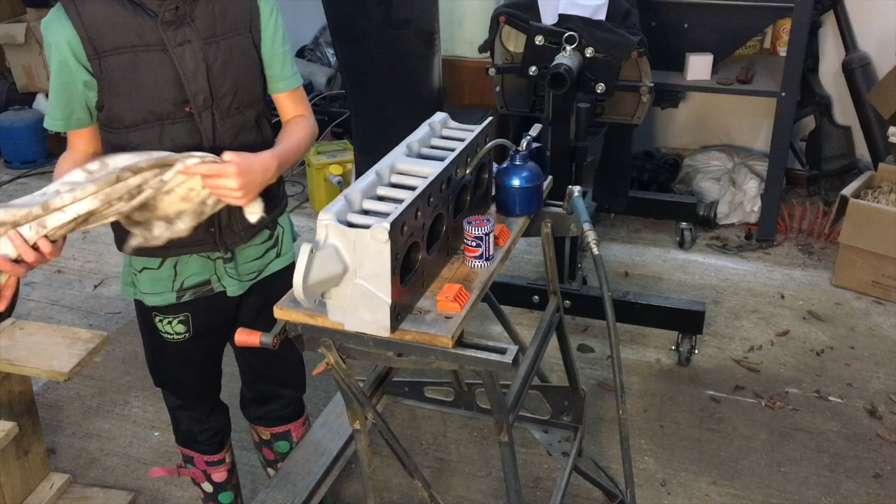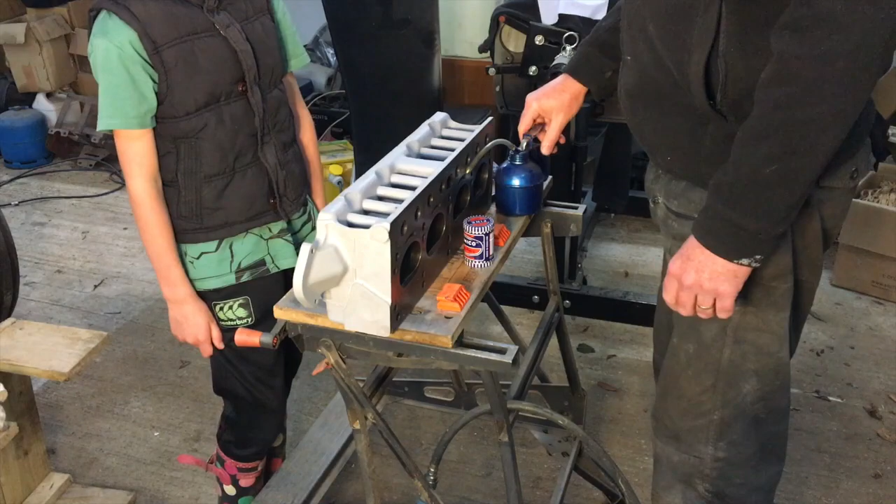Hi Oscar. So last week we cut the valve seats, and you remember we were struggling with one of them where it seemed very deep, and also had that nick in it, and we had to cut and cut and cut.

So one of our subscribers, Hooter700, saw that, and he provided me with some advice. Basically, he said that we need to cut the face of the head down to minimise the size of that actual angled face. I think it'll be easier if we do a drawing, and I'll explain what we need to achieve.

Okay, I'm not a very good artist, but let me try. So if you imagine that's the face of the head, and then we have an angle, and then we have the channel that the valve stem rides in, like that.

Now, what we've done is we've cut that face so that the head of the valve is now sitting at pretty much the same level as the head. So now, the other thing to note is that the profile of the valve is like this.

Now, what he's saying is that the head needs to sit pretty much at this point here where the valve - if I blow this up and exaggerate it, that's the profile of the valve. What he's saying is that the head should pretty much be at this point here where the valve angle changes, right? And especially for exhaust valves.

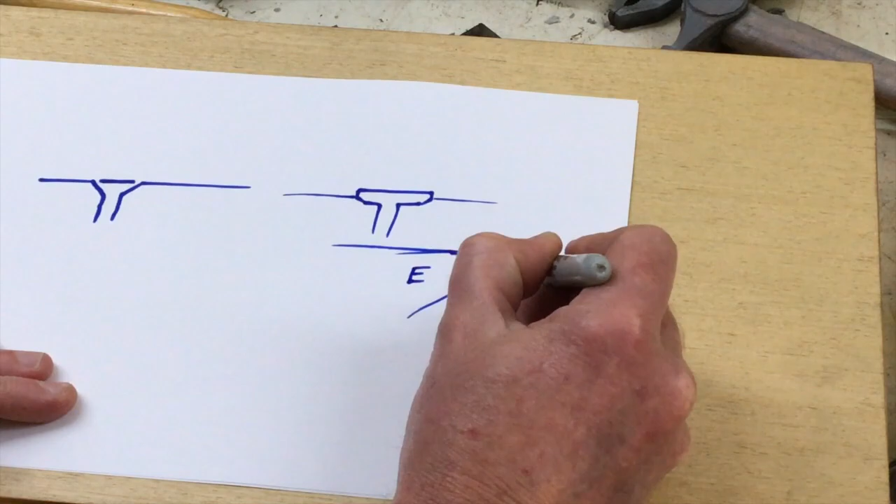So exhaust valves need to be like that as much as possible. For your inlet valve, it doesn't matter if it's a little bit down, right? And that's because the exhaust valve wears more quickly than the inlet valve, because the exhaust gases are more corrosive than the unburnt gases, if you see what I mean.

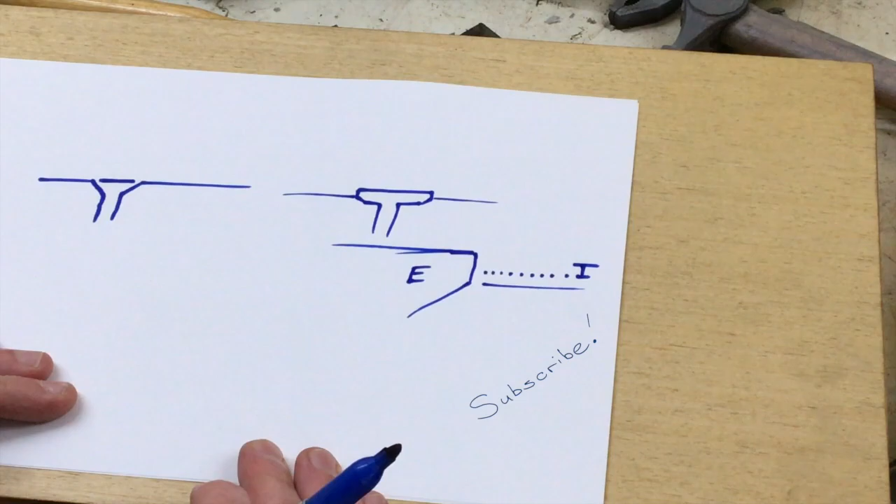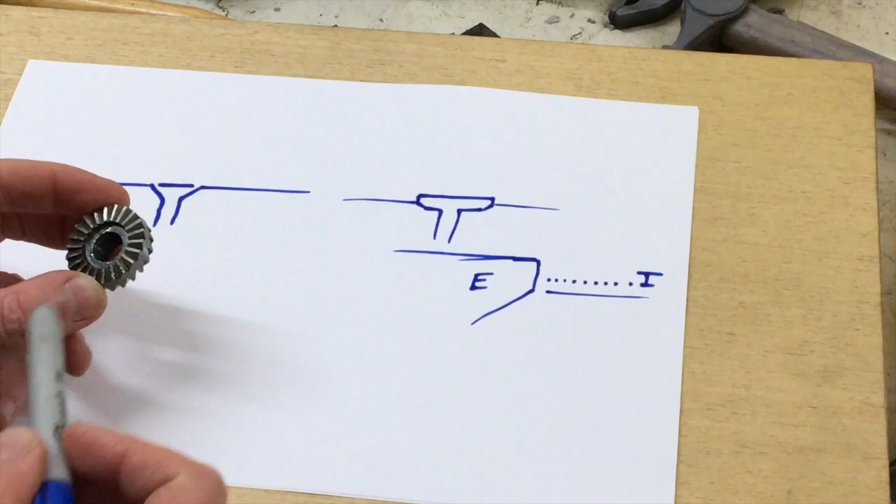So what we need to do, and what he's suggesting - if you noticed on the cutter last week, the cutter has, in fact, let's get one out. So the cutter has, you see, this is the angled face that we were using for cutting, but it also has teeth on the flat side.

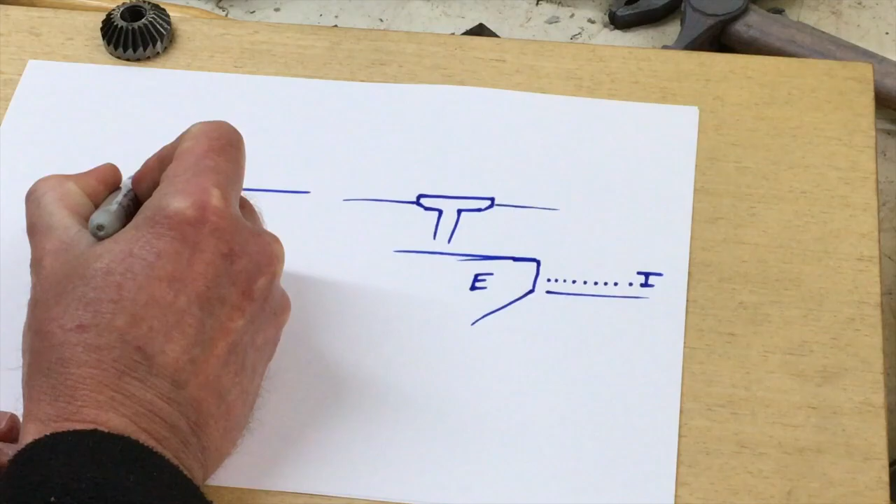And so what he's suggesting is that we turn the cutter around and we cut into the valve head face a little bit, so that we'll essentially create a recess underneath here. Obviously I'm exaggerating it, but really just to create a bit more clearance around the head and the valve where they come together.

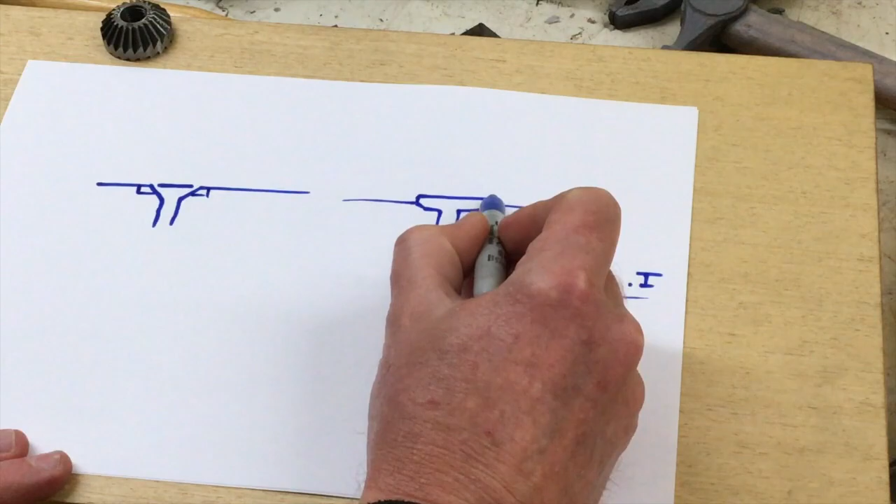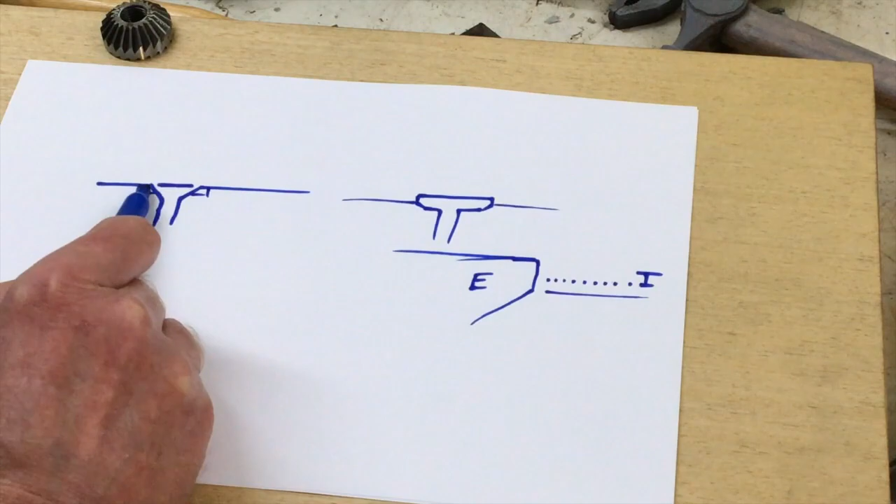So we're going to give that a go. It will also reduce the size of this angled face. You don't want that angle to be too big, because then it basically over-seals, if you see what I mean.

Bear in mind that when this valve lifts, we might think of it lifting a lot, but actually it only lifts a couple of millimeters. So if you've got a long face that's sealing, there's a risk that not all the gases will get out before the valve closes again. So you want that sealing face to be not too small, but not too big either.

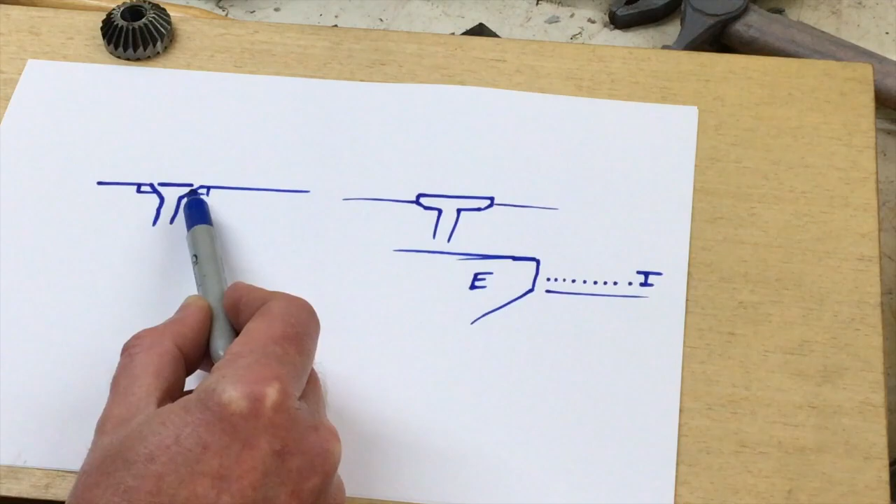So by cutting down, you can see here we're going to reduce the length of that face by an amount - I've exaggerated this, but in this drawing it looks like about half, right? We probably won't cut that far down, but the point is we'll cut that down. The other thing that's going to do is remove that nick we were fighting against last week, because we'll be cutting into that face.

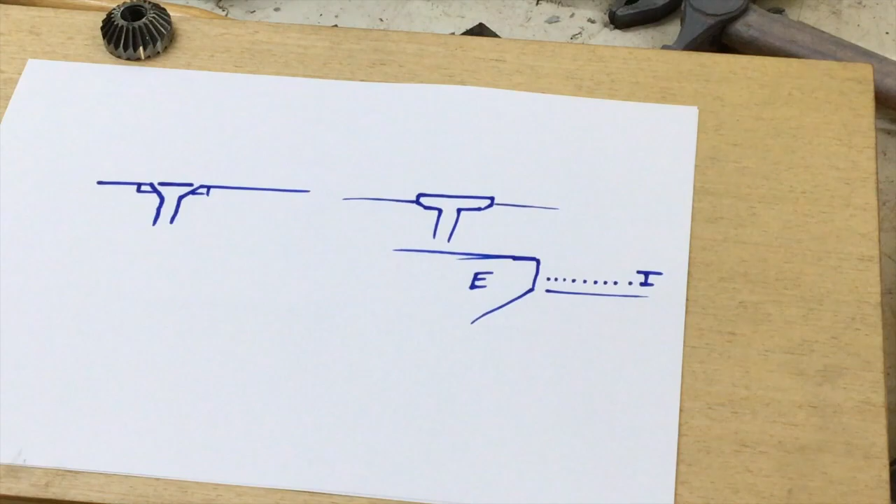So that's what we're going to do today. Unfortunately we probably won't get to installing all the valves today. This is a little bit of a setback, but it's better to get it right now and do it properly. We don't want to have to do it again later when things aren't working properly. Let's get set up, and then we'll give that a go.

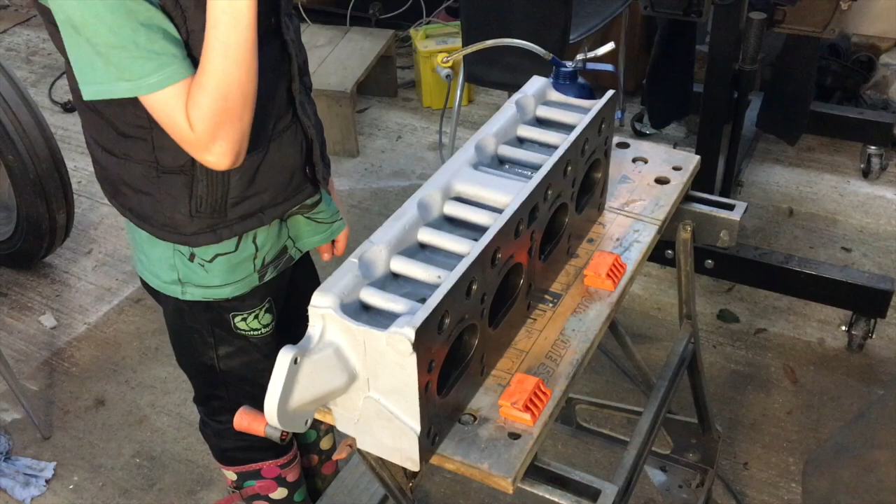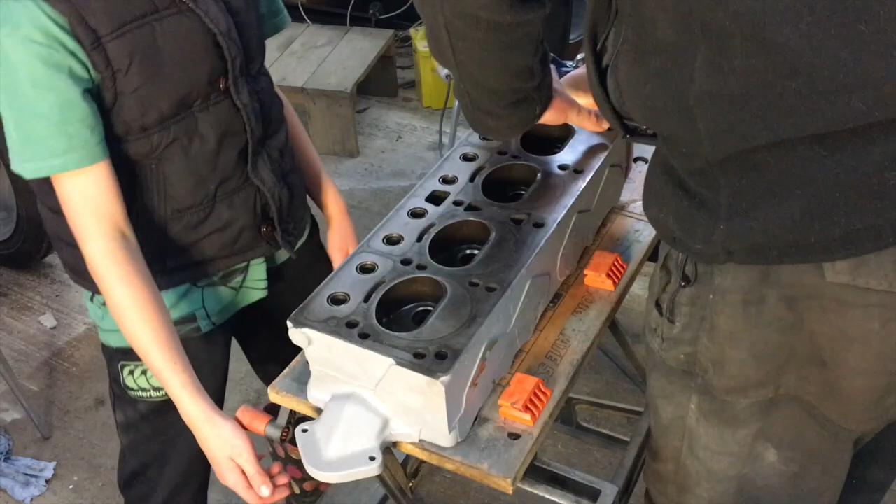Okay, so we need to turn this over again, get back to that one that was a problem. Okay, so it was this one here - see, there's the nick. And you see how wide that face is? Yeah, it's actually quite wide, isn't it?

Okay, let's get the cutter set up. You know how to do that. Yep.

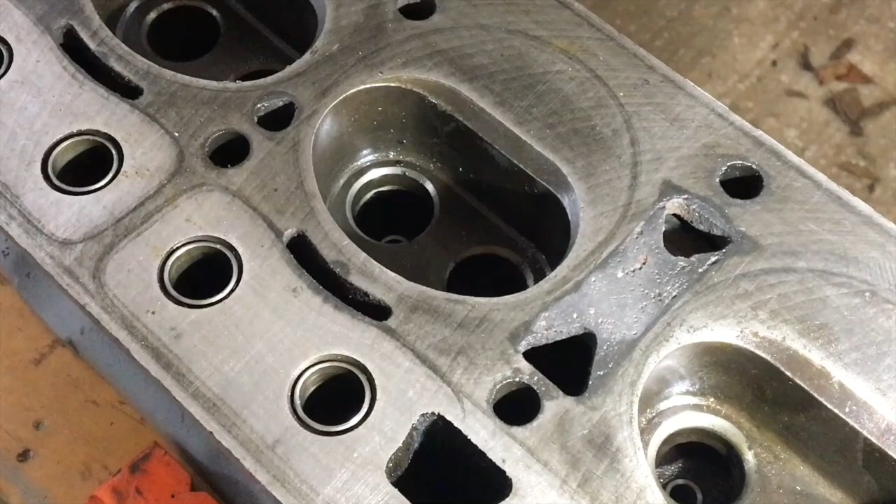So this is the face that we're talking about. Compare it to the one on the right. I'll try and hold the camera still, but see how wide that one is and how narrow this one is. This is what we need to address, basically taking down the top so it looks similar to that. I don't know if we'll be able to go all that way because that looks like a lot of material to take off, but we're going to give it a go and see how it works. We'll try to minimize the width of that sealing face over there, and that'll also take this nick off for us, which is what we're trying to achieve.

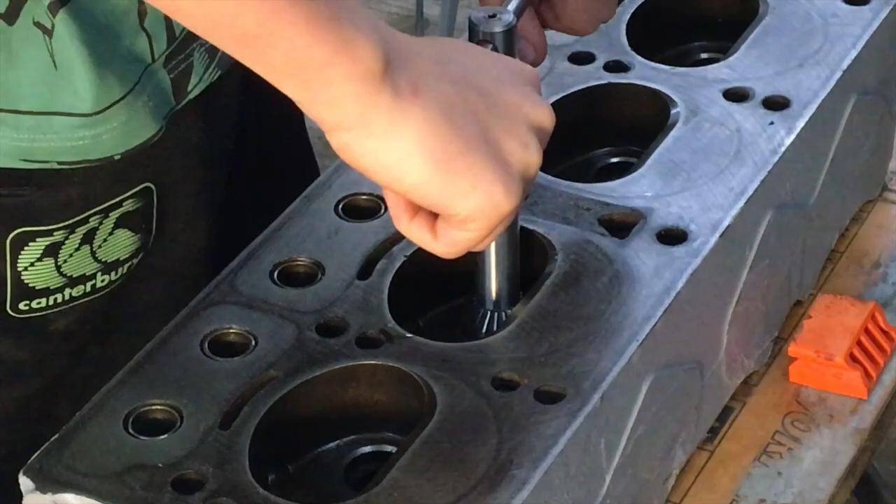Surely every time you have to do this, eventually this would get too weak and you'd have to get a new one. Yeah, in theory, although it's a big chunk of steel, right? Well, cast iron. And you don't have to do this every time, that's the point. How often does this happen? This tractor is a 1952, and I don't know how many times this engine would have been rebuilt in its life, but probably only once or twice, if at all. This could... yeah, I think it has been rebuilt at least once, because there's evidence of... Yeah. Right, let's clean that up.

And see how we're doing. Okay. But you see how already we're seeing some clearance around that, around the head. Can you see that? Yeah, I mean, I don't think that's actually getting under. No, we just need to open that up. So, okay, it's going well. This should keep going, I just wanted to make sure we were actually making progress.

So would it be going like that? Not even. No. Like that. Okay. Go some more. Almost there, I'm just going to spray it with air.

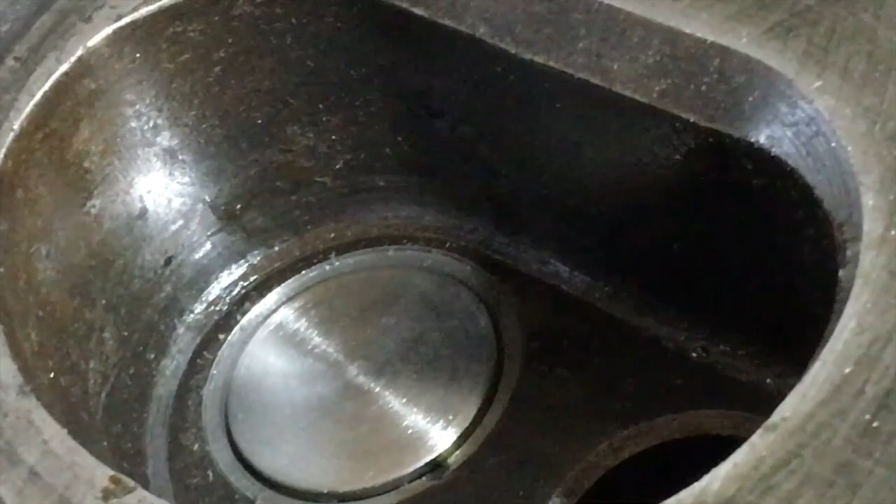So there you can see we now have clearance on the perpendicular face of the valve, and that's what we're looking for. And that's about as far as I'm prepared to go. I don't want to cut too much into this and take off too much meat at this point. This is an exhaust valve, so we do want as much clearance as possible, but that perpendicular face is only about 2 millimeters, and I think we've got about 1.5 millimeters exposed at the moment. So I'm actually happy with that.

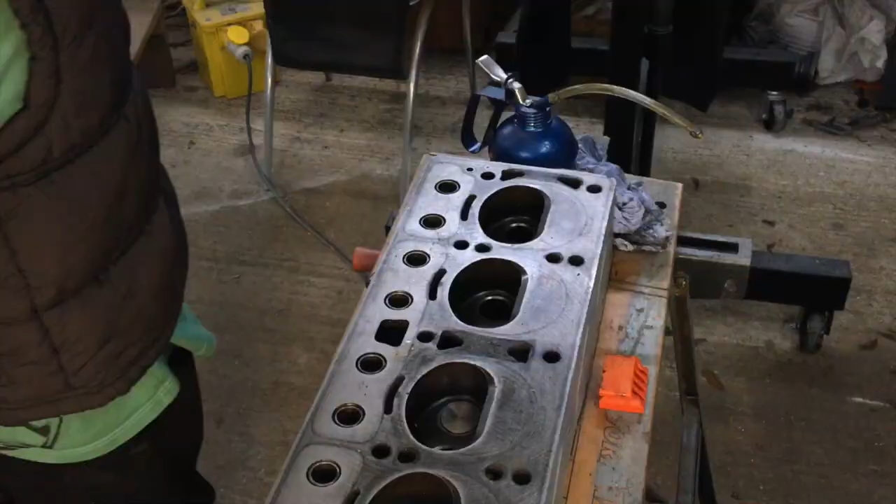So what I think we should do with all the others is just give them a very light cut with that flat cutter. And I noticed one of these, that one there, is a little bit bigger than I'd like it to be, so we can take that one down a bit. But all the others, if we just basically... it's like deburring.

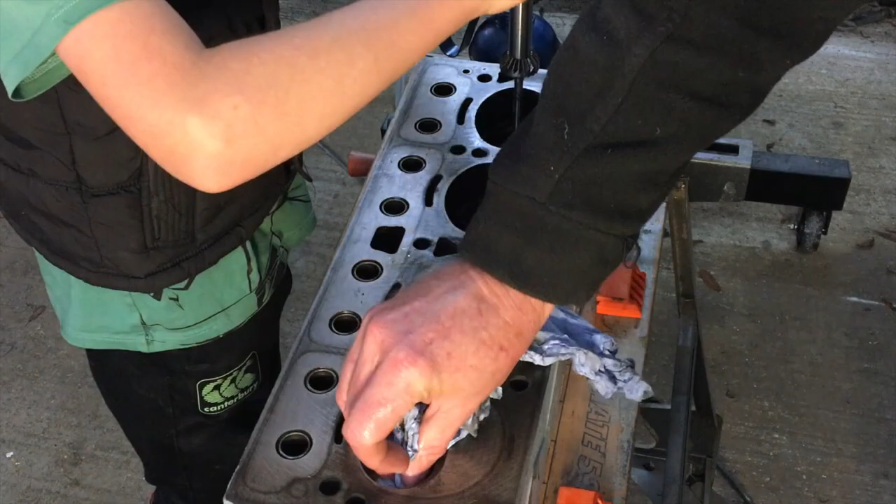Do you know what deburring is? No. So when you cut something, you always end up with splinters on the cut edge. Think about when you're cutting a plank - the outside edge always gets splinters on it. Well, those are in metal, those are called burrs. What we want to do is just take those off, so we're going to do a very brief shaving, just to clean them up. And then on that one there, we'll take it down a little bit because that sealing face is a little bit bigger than the others, so we'll just give that one a bit more.

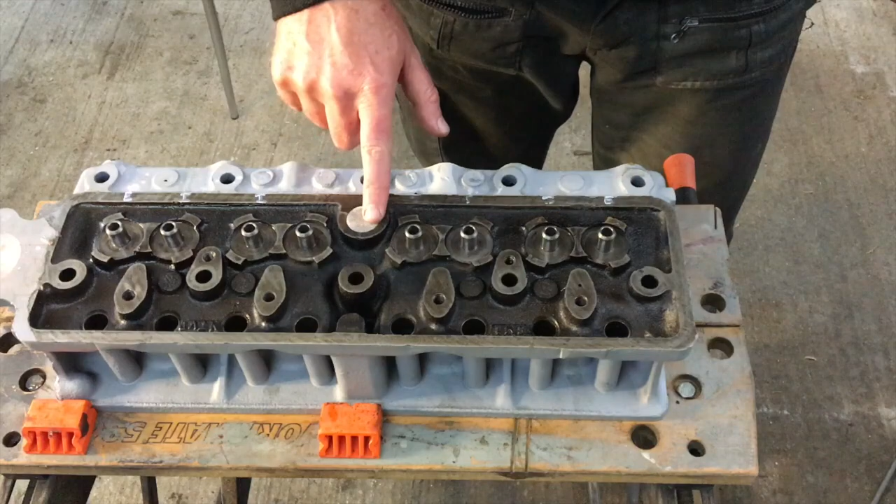Okay, for the next job we need to remove this white metal plug here. We've talked about this on a previous video. I've got a 3/4 inch BSP tap, and what we're going to do is tap that hole, and then insert this brass plug to seal this off. That will last a lot longer than the white metal plug.

And also, we talked about these cracks. You've got 3 of them over there. So we're going to be putting quite a copious amount of Loctite. I've got Loctite 515, which I'm going to be using on that. I'm hoping that's going to seal off and prevent any coolant from leaking out of this area into the top of the head here, which is where we want lubrication, not water.

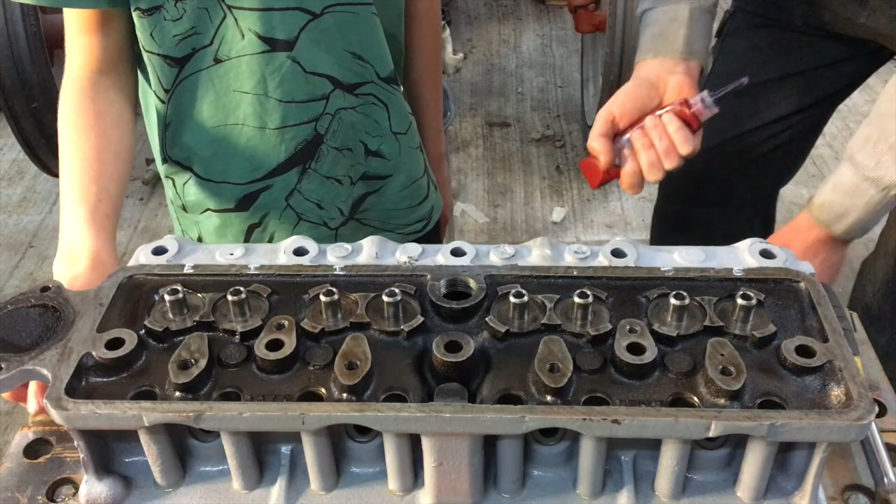So we get a spanner for that. Oh yeah, that's difficult. Hang on. That's very thick, isn't it? I don't know what it's supposed to be like. Well, it's definitely not supposed to be on the floor. You have to clean that up.

And you normally wouldn't use this much Loctite, but because of these cracks, I want to make sure that we've got more than we need, if you see what I mean.

Okay, I'll put the lid back on that. Hang on. Let's just wipe it. Okay, now I put the lid back on. Thank you.

Right, let's get this plug in. Okay. Right, tighten it.

And we got more power pulling, right? Turn your wrist the other way. Turn your hand around, that's it. That actually feels like I've got less.

Okay, well let's see where the flat is. So now you want to turn it so that that flat is straight. What? That flat needs to be straight. Okay.

A little bit more. Just a touch. A little bit more. Let me do it. There we go. Perfect.

All the engine parts are being cleaned except the rocker cover. Looking inside this rocker cover reminds me how filthy this engine was. Look at this gunk on here. Oh yeah, it's terrible, isn't it? It's like tar.

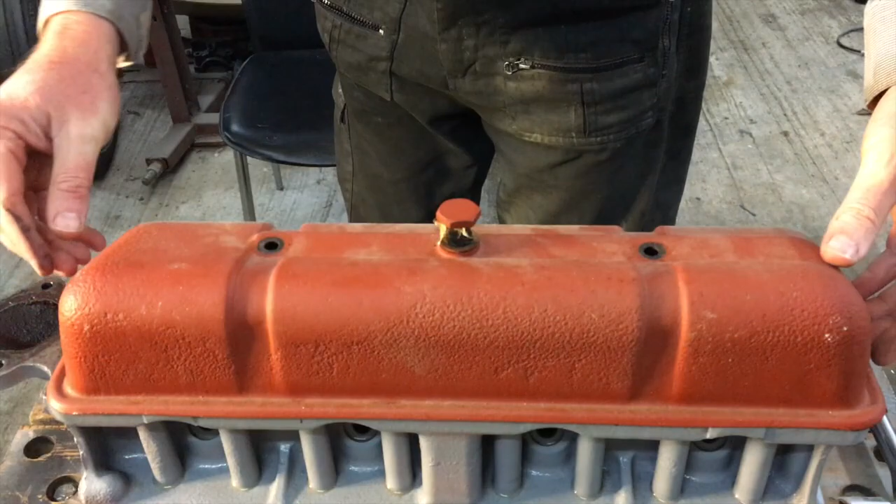Throw that in the bin, please. Right, I can't remember which way this goes. I'm guessing it would have to go that way. But there you go, that's sitting perfectly on there. It's not being held up by that plug. Right.

Well, I think that's it for today, Oscar. Next week what we're going to do is install the actual valves, right? So we'll run them all in. We've now got them, they're all been marked up. So you've got there number 1, so that one will go there, number 2, that one will go there, and so on. They've all been lapped in, which is why it's important that they go back in the same place.

And we've sorted this out, so yeah, next week we can put the valves in, put the rocker cover, put the rocker arms on, and well, not really, because actually we need the push rods to be in properly for that to go in properly. So no, we won't do that. We'll just put the valves in, and then we'll seal the head. We'll wrap it up, keep it nice and clean. And we'll start the following video, then we'll start on the engine.

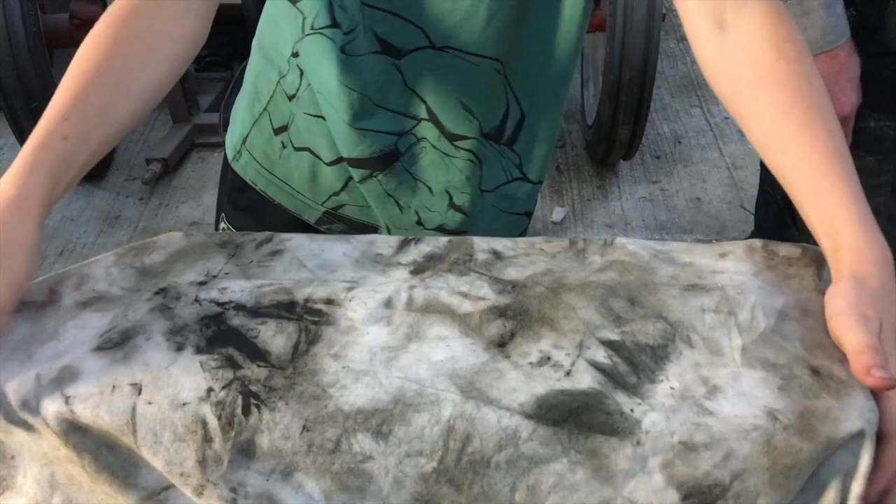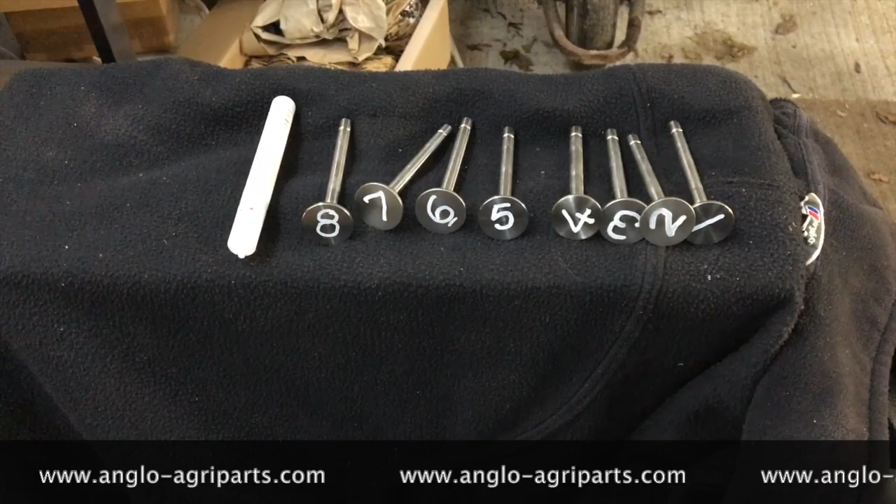Okay, so that's pretty cool, isn't it? Right, let's cover this up for the week, for now. And we'll also cover up the valves. So if you get some paper just to cover the valves there. We've got all the valves sitting here ready to go into the head. I'll just cover them up so they don't get dusty during the week.